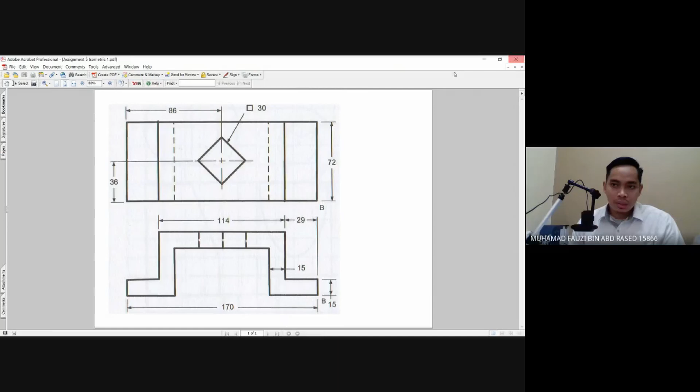I know some of you might have a problem understanding and completing the drawing from orthographic to isometric, so this geometry will be your assignment. Please pay attention, and I really hope you can follow my steps. I will demonstrate, and then you can follow me.

For isometric, before this we already talked about two things: the first is isometric drawing, and the second is isometric sketch. Drawing is this one, where we use all the drawing tools - your ruler, your T-square, your drawing board, your compass. For isometric sketch, we will just use pencil and nothing else - no ruler, no T-square, no set square, no compass, just you and your paper and your pencil or pen.

That isometric sketch I will cover after I do the demonstration for this geometry. Alright, let's start.

If you have this orthographic drawing, you have the front view and this is the top view. So for isometry, the first thing first is you need to have a proper plan - you need to plan how to convert this orthographic drawing to isometric drawing.

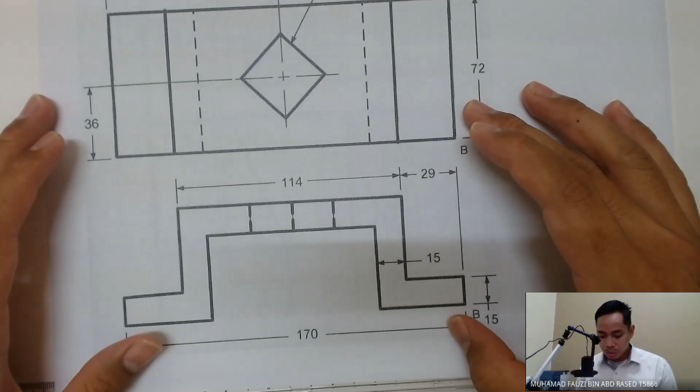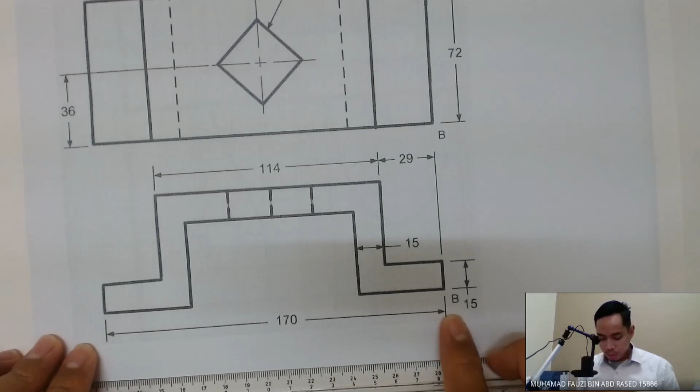With a given drawing sheet - for this we have A3 size paper - you need to plan according to the dimension of your part. As you can see, the length of your part is 170mm, the width is 72, and then the height - I think we don't have the proper height here, so let me draw it for you.

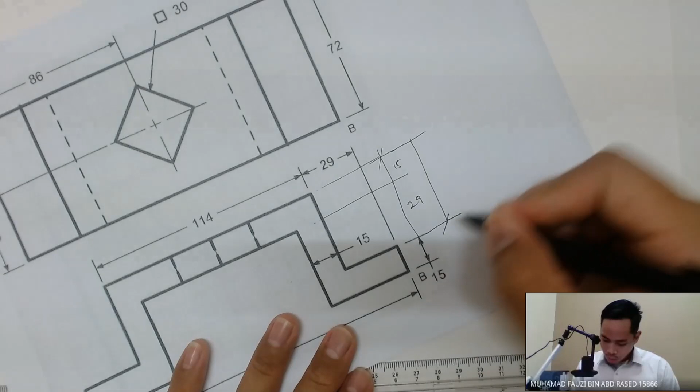Let's do some assumptions here. We got 15 here, this one is also 15, so this one is 15. Just make it 15, and it's up to here. Then we got 29, just repeat this, okay? And then for this dimension is 44, 44, then 15 - the total we got is 59, right?

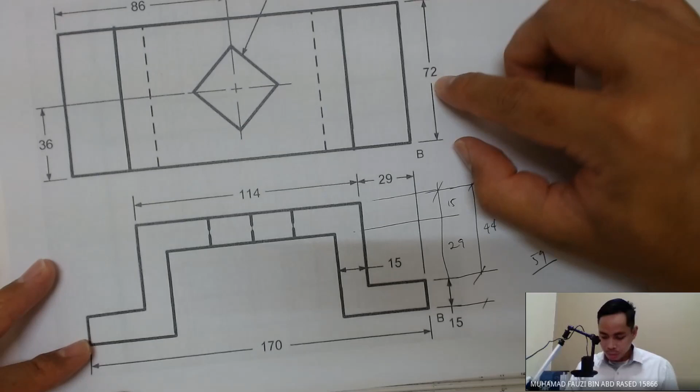So because your dimension is 170, 59 for the height, and the width is 72, your drawing needs to be a little bit offset to the right hand side. You cannot do it at the center - you need to go a little bit to the right side for your isometric axis.

For isometric axis, use your HB pencil for your construction line. Make your vertical line, and then a 30-degree line to the right hand side, and at the same point make another line to your left hand side. So this is your isometric axis.

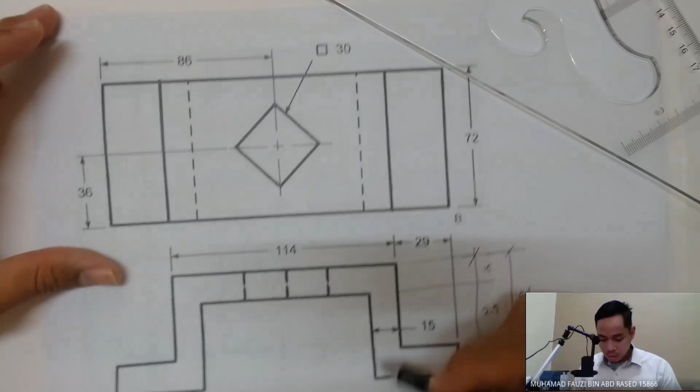Now the first thing you need to do for isometric drawing is what we call the enclosing box. The enclosing box is the box that will cover the whole features or whole shape of your part. That means first you need to ignore all the features - this L shape, this C shape, and this box here. You need to ignore it first. What you need to do is the enclosing box.

Here the line we have 170mm, so you need to measure 170mm. Actually, I've intentionally put 171mm here because at this point I will use at 1mm here.

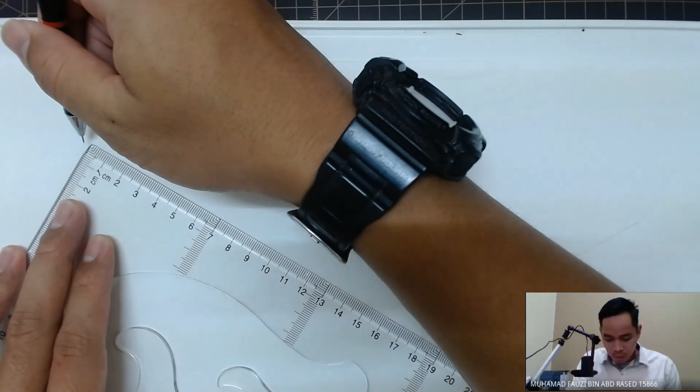I can use it at here, but usually you will lose accuracy because sometimes the angle of your pencil is not correct, and then you might make a mistake marking the correct dimension. So usually I will put it 1mm more than it's supposed to be - so it's here 1. I need to extend the line. So this is the mark, right?

If you have a question or maybe you don't understand, just ask, it's okay. Actually you have this mark 170, and what you need to do is bring it down.

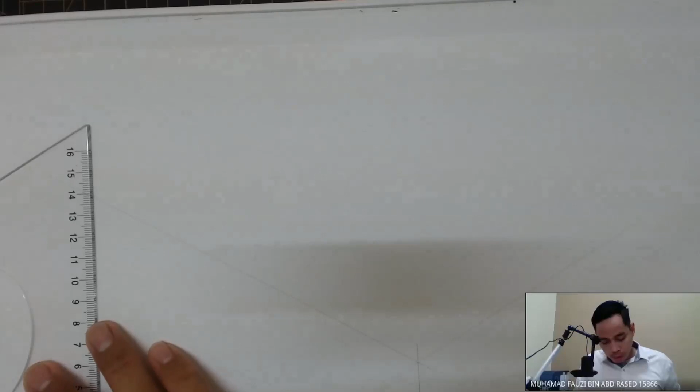Because isometric drawing is all about three axes - you got axis 1, 2, 3, it's all about this. So for this mark, we already put it on this line. What you need to do is add another two lines - the vertical line, and then at the same point make a 30-degree line to your left hand side and right hand side. That's it.

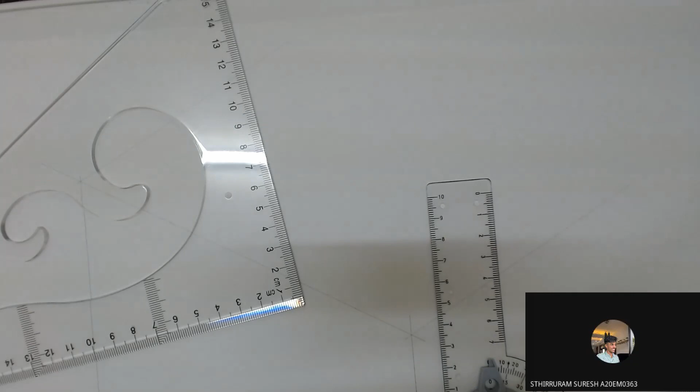Next, the height is 59. Excuse me doctor - yes - you construct another three axis point on the other end? Is it at the end of 170? Yes, at the end of 170. We just now measured 170 here, right? From this point to this point is 170. Okay, thank you doctor.

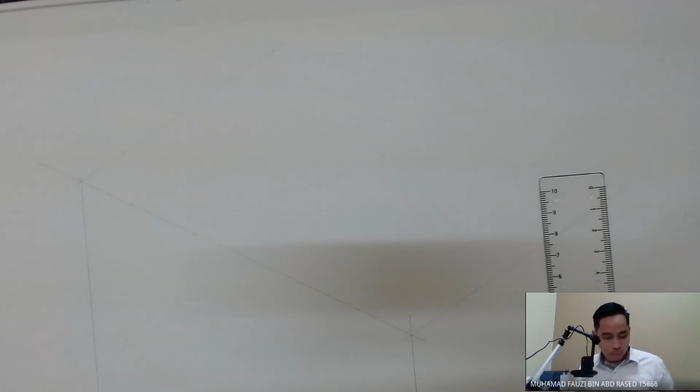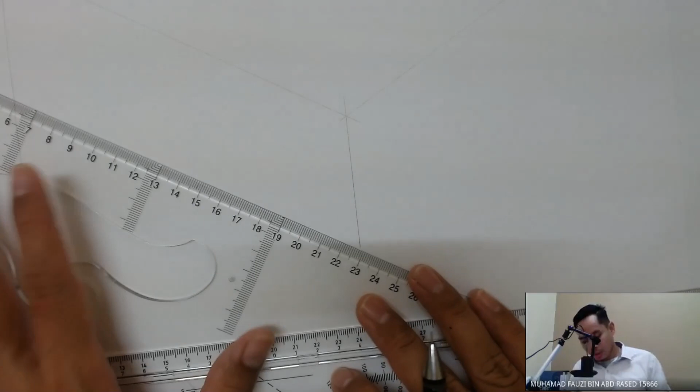Because currently we try to make the so-called enclosing box for our geometry, first you need this box. So 59 here - this is your mark, 59mm. And then from this point, we already marked it on this vertical line, so what you need to add is a 30-degree line to the right hand side, and another 30-degree line to your left hand side. Isometric is always about these three lines.

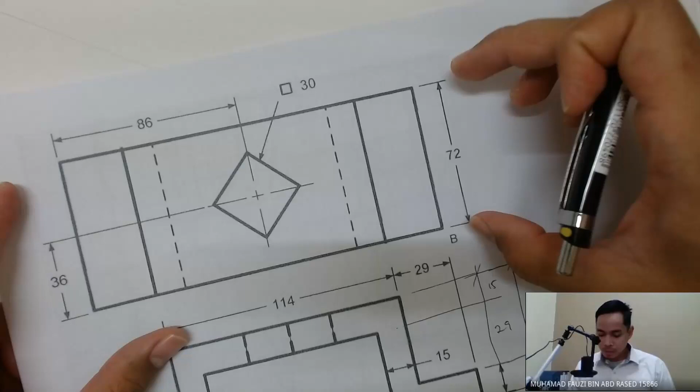Now we got the width. Okay, the width is 72. So please pay attention on your dimension, because maybe you see this 72 and thought this one is the height of the part. Actually it's not, this is the top view or plan view, so that means this dimension represents the width, not the height. The height you need to measure from your front view.

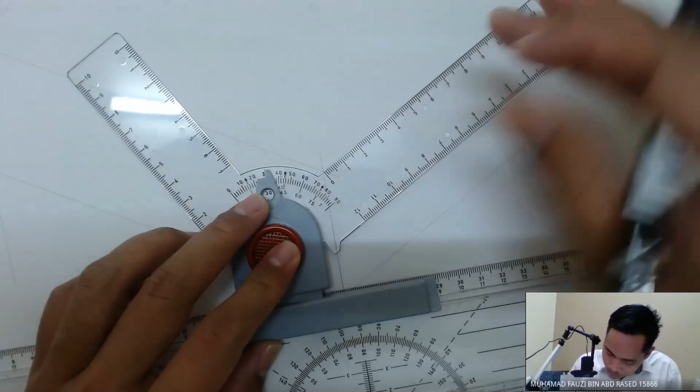Right, so we got 72 there for your width. Mark 72. So you got this mark, and then because this mark lies on this 30-degree line to your right hand side, what you need to do is add the vertical line and then 30-degree to your left hand side.

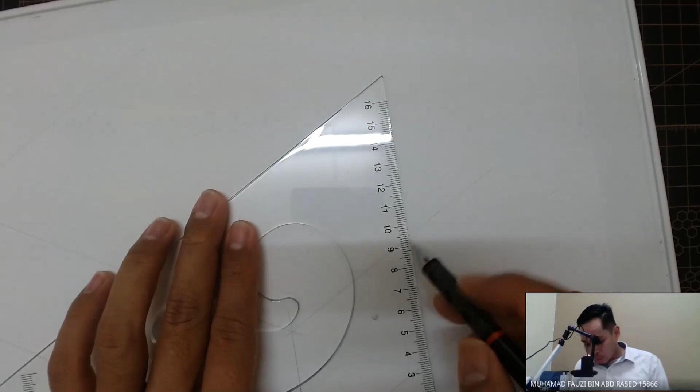Alright, now we finish our so-called enclosing box. So this is the box to accommodate this geometry. Now next, here we have this front view and then top view. Usually I will do the front view first. So for our box, this is the front view, this is the top view, and this one is for the right hand side view.

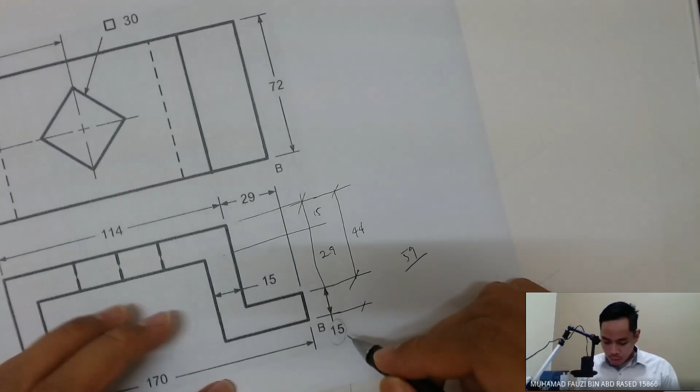So we have this 15 mm here, mark 15 mm from this bottom, for the bottom of your enclosing box here point, and then 15 mm there.

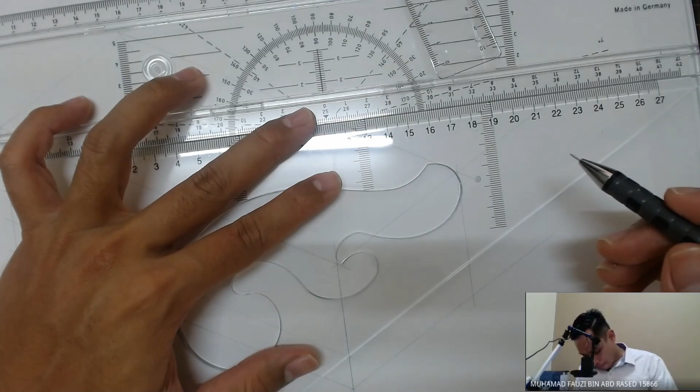And you got this mark, and so again it's all about three axes. You already have this on the vertical line, so make another two lines to your left hand side and then your right hand side. So here we have these two lines that intersect to these lines and this line.

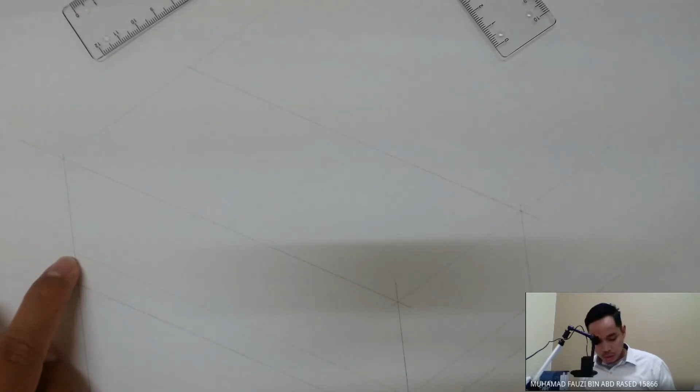But you need to refer to your geometry again - is it really necessary for you to add the lines here or not? For example, we have this line, we have this geometry, obviously we have this L shape here, so we have this space here. Definitely we need to make another line that connects to here, right? We need to have this line.

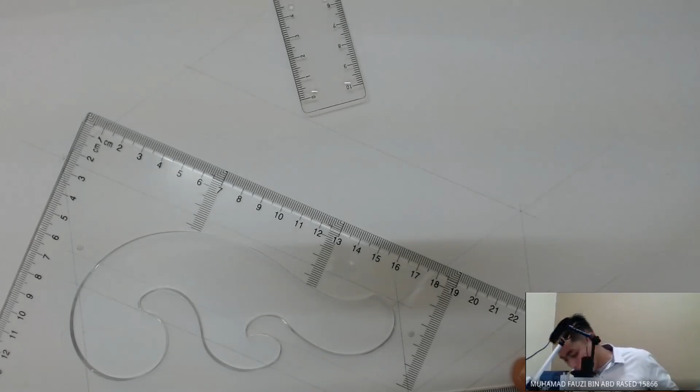So make your... right, so you have this line, and then it's the base for your object. And then we have this - the length of this part is 29 plus 15, that is 44, right?

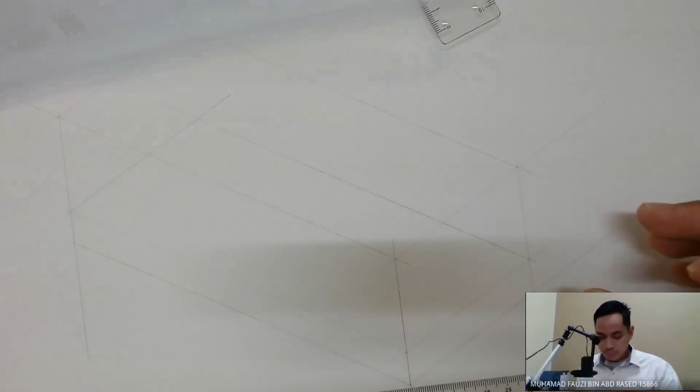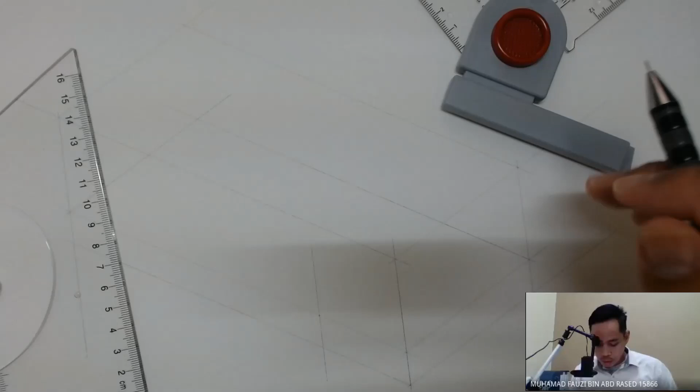So, put 44 mm mark here, and then mark, make a vertical line. Vertical line, just like this. So what you need to do now is measure another 29 mm here for this at this line.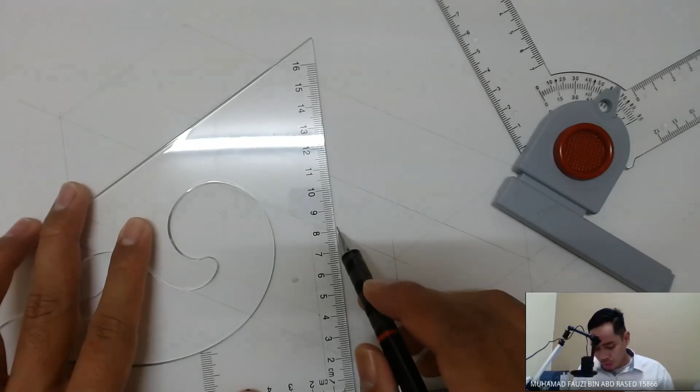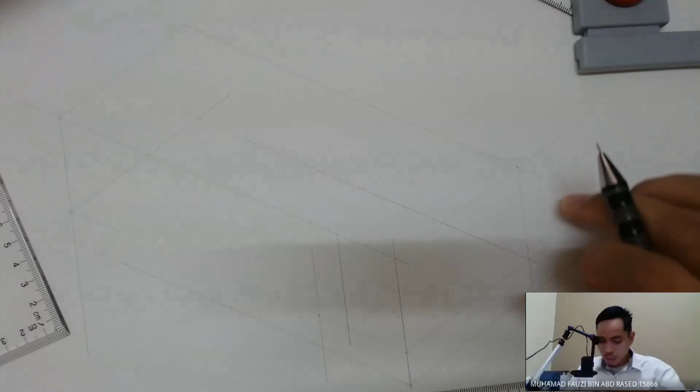29, that's there, and then make vertical line. This is the vertical line here, and then from your top view we have this object line, so that means at this point you need to make the line to your right hand side.

To your line, and then same goes to this intersection point here. And then this line actually at this edge, and this is the same line. 1 and 2 really lie on the same line, and because this is from the top view, that's why we have this one and two line.

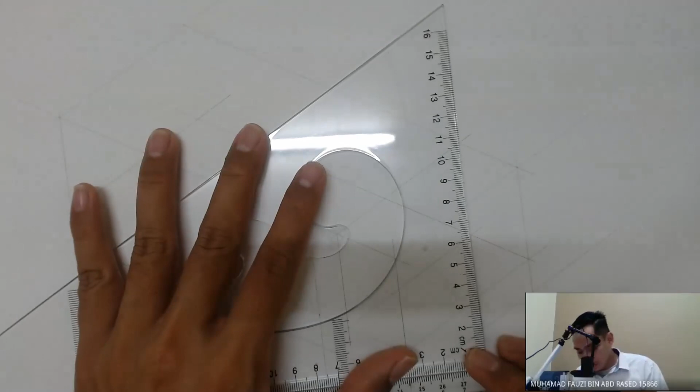Alright, next we have this intersection. So this actually is at here at this point, right? So that means you need to make the vertical line at this point.

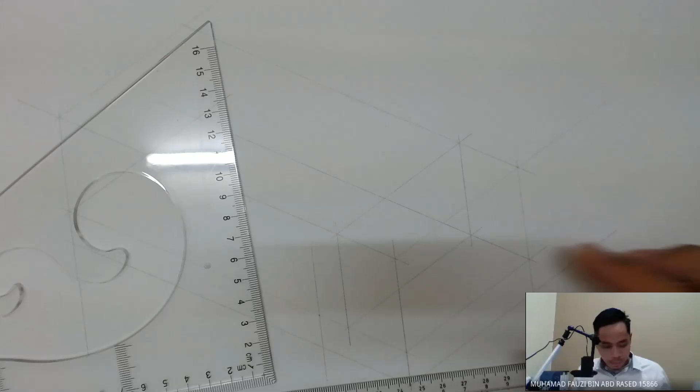Next we have this 15, and just assume all of this dimension is 15 - same goes to this part is 15. So at this line you need to measure 15 mm, so this is your mark, and then bring it to your left.

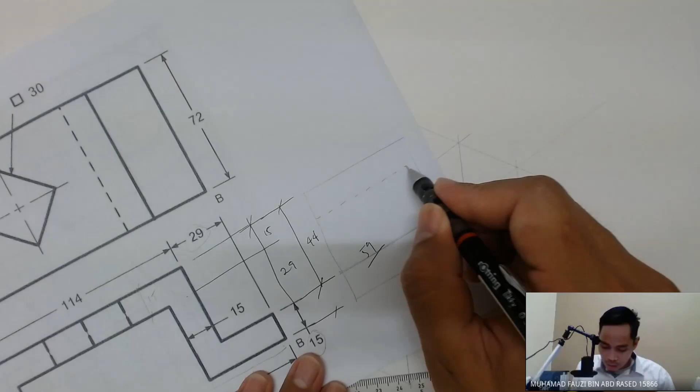So you have this one, and then the question is, do you need to make a line on your right? Obviously, if you draw the shape of your right side view, this is the box, and then you have this object line that represents this one. Then this one is a hidden line that represents these features. So at this point, at this line, no need to make the lines here because it's a hidden line. Obviously, in our isometric drawing, there's no hidden line, so no need to make another line here, just leave it like this.

Alright, next we have this 114, and from this point 114 to your left. 114 mm this line, so as usual, because at this 114 we have this at the top view, we have this object line.

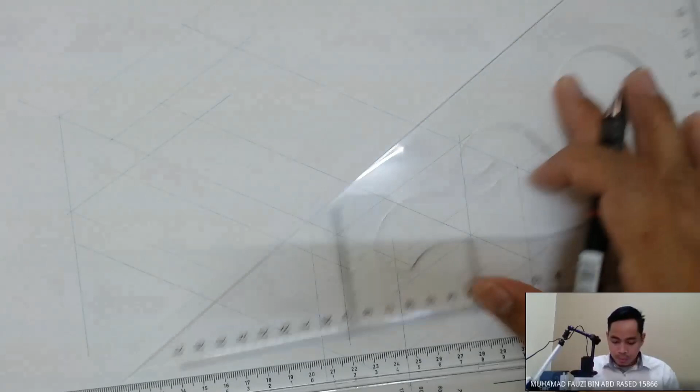Let's make the lines at the top view, and then same goes to, because at the front view we have this line, so we make the vertical line at this point, just like that.

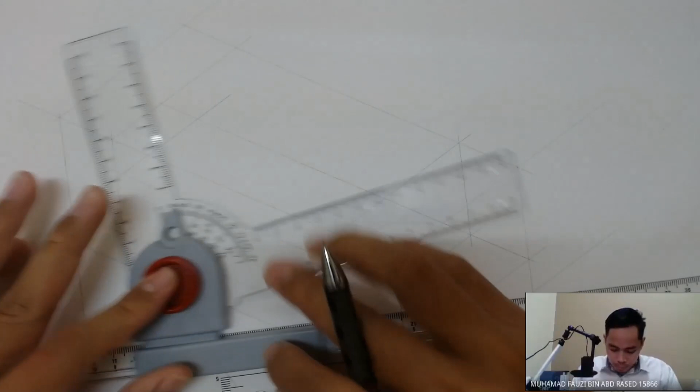And then again, because our assumption is 15, at this point we measure 15 point to your right, so downward. Alright, so 15.

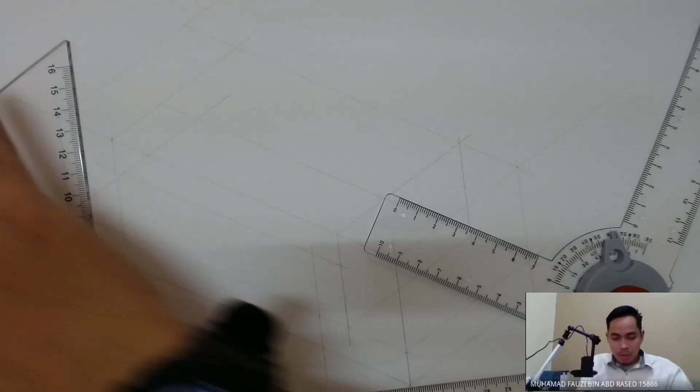So we got this mark, and then same thing, make the vertical line here. Right here, this way. This one, okay.

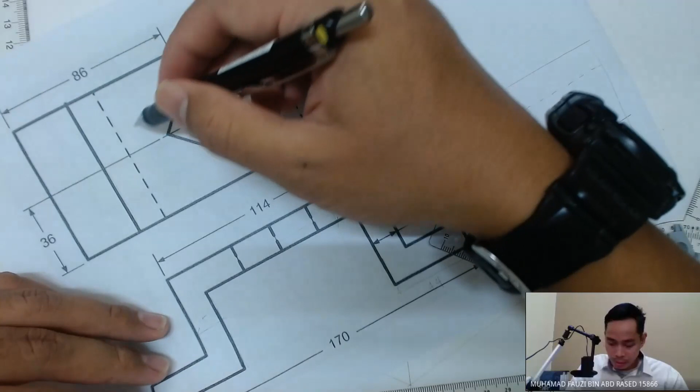For this view, as you can see here, this is the hidden line that represents these features from the top. We see these features have this hidden line. So at the base here, it's supposed to be another object line, right? Because this is the base, and then we have this slot, this empty space here.

So by right, this one is gonna be the base for our part. Make a line here, such a line here, only up to this point. No need to make it longer because it's not really necessary.

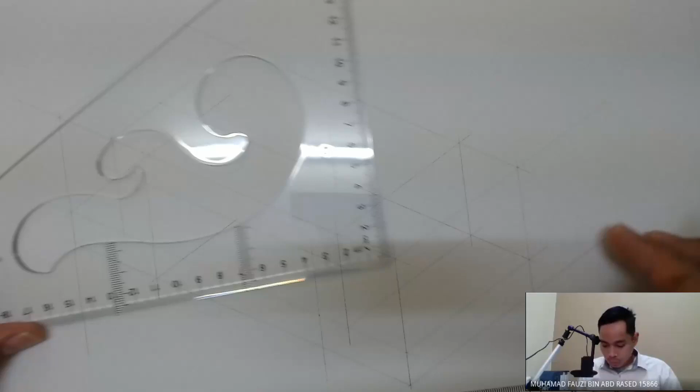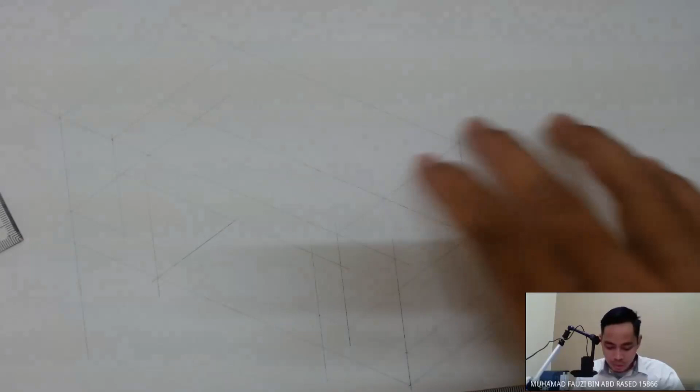So now we already have this geometry. Can you see the exact shape of our geometry from this construction line? Do you see or not? Yes, you can see, right? So this is actually how isometric drawing works.

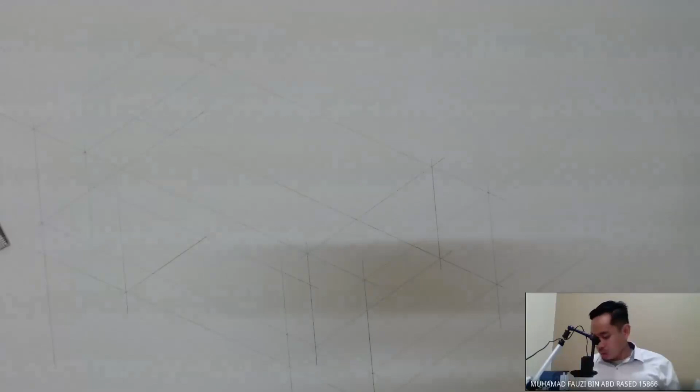Because after you draw all the construction lines, you may see the overall, exact shape of our part. So just use your 2B pencil, and enlighten the lines that represent the object line.

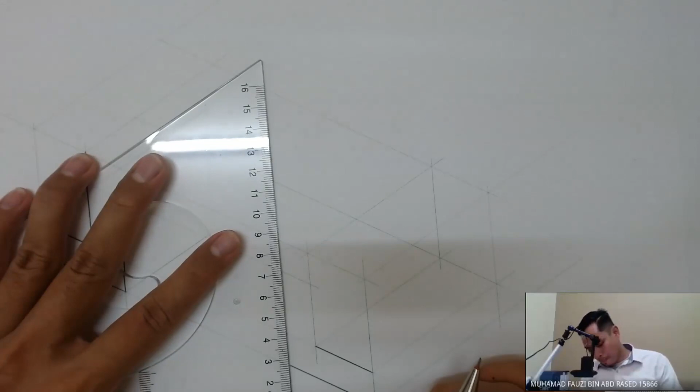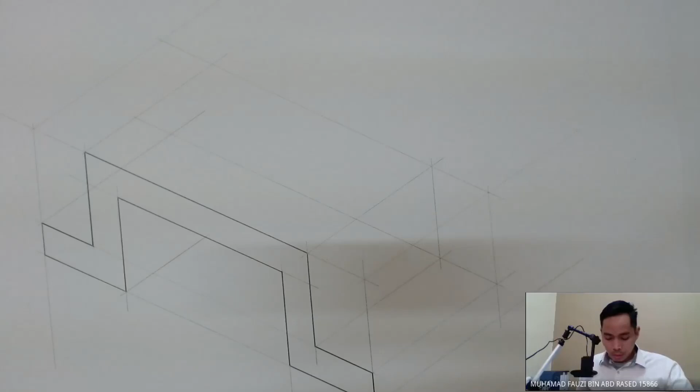Now we finish our front view. This is our front view. You can see here, this one is this one, right? Next, we will do the object line for other views, for example, this right side view.

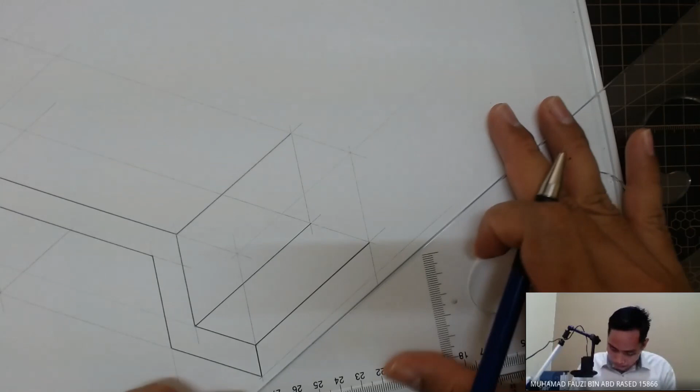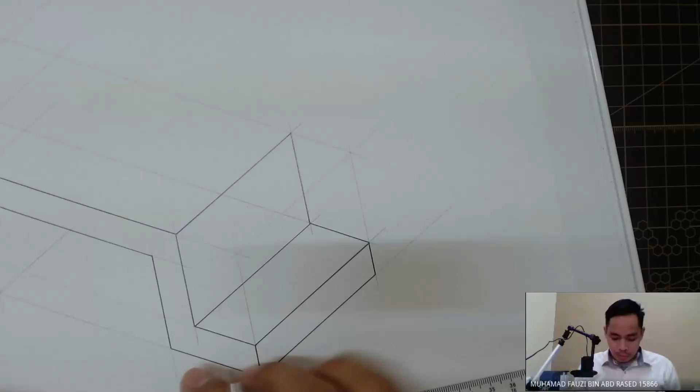When you complete your right side view, you have this surface represent this surface, and then you got this surface represent this surface. And then again you have this line, this thing goes to this one because this is empty space here. So make the line from this point to this point.

Okay, so that's it. Next, let's proceed to our top view, our top view.

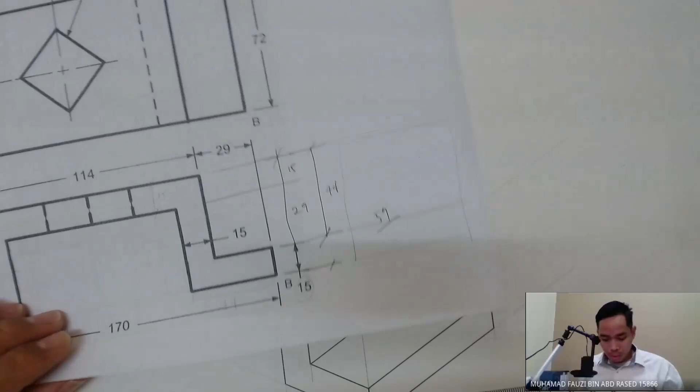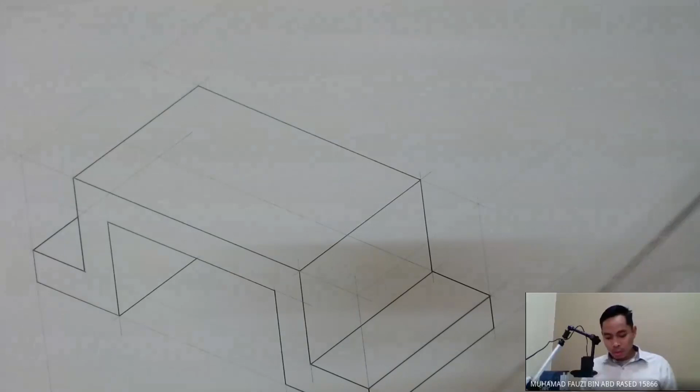Next, this point, only from this point to this line. No cross, because in isometric drawing, again, no hidden line. Just make it up to this point. So yeah, this is our shape of our parts. Next is we have this hole.

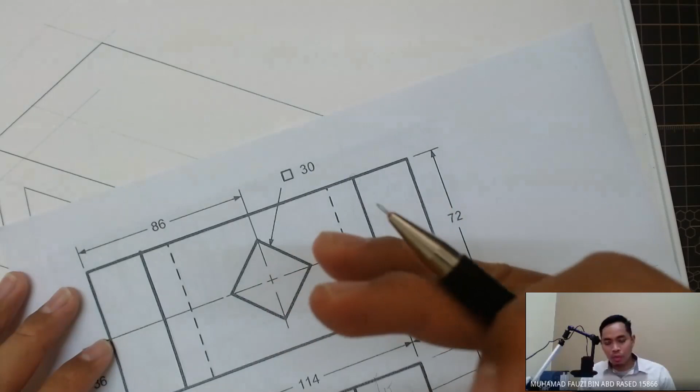The dimension is square 30. So in drawing, actually, you will see some of this kind of notation. Before this, we're talking about holes, drill, or the notation like that, and then sometimes the other part is we call C bore. Actually, the C bore represents counter bore. Later I will explain to you what it means.

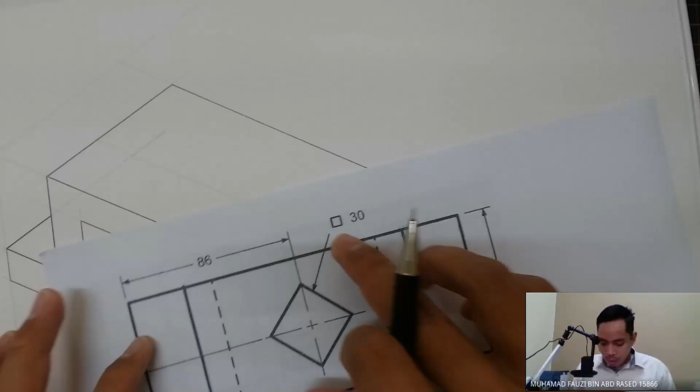So we have this square 30. That means this square has 30 mm fixed on each side. You need to draw it at this top surface, this is your top view, so this is your top surface.

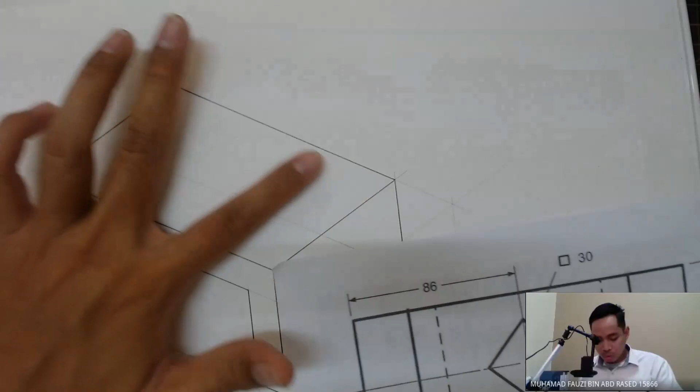So with the given dimension, its center is 36 and 86. 36 on this axis, and then 86 on this axis. Actually you can translate it to your right hand side, it's also 36.

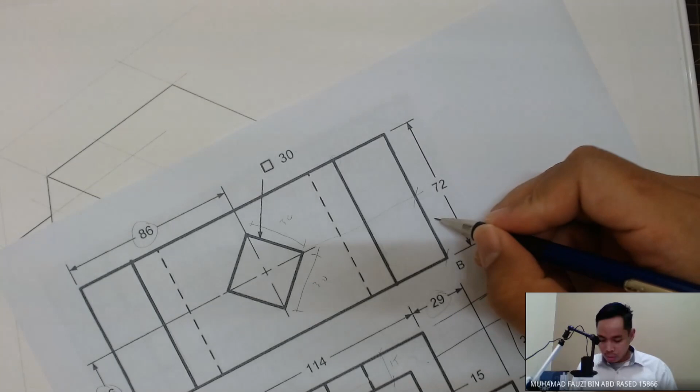So you have this, we call it axis. Just straight away put the 36 mm from this center. Here is right there, and then make the line to your left. So this is your line.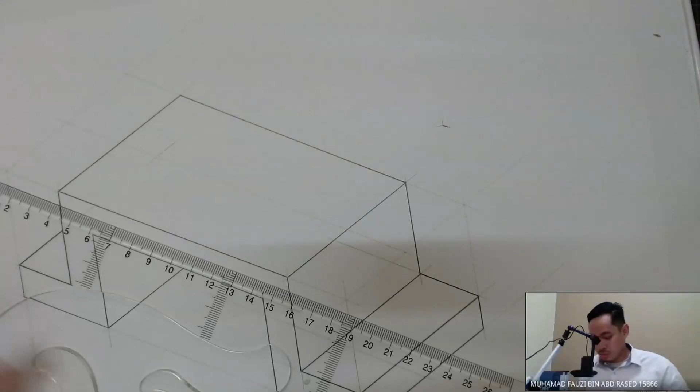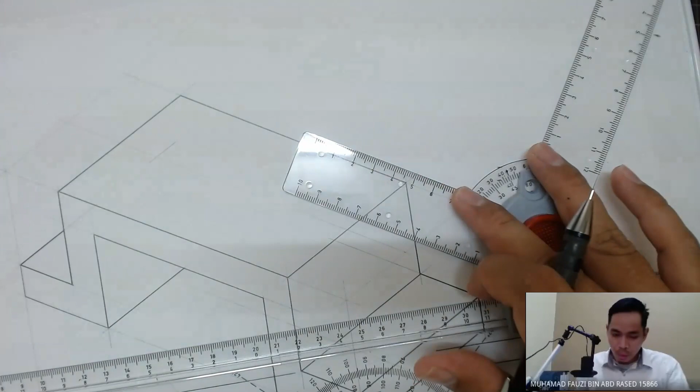The next thing is we got the 86 mm here, and then measure 86. Don't get it wrong, because this is the edge of your visible surface. However, from this edge, that means you need to measure from this point, make it 86 from here.

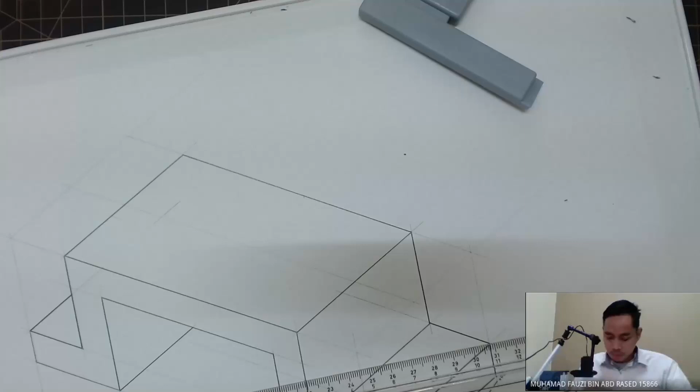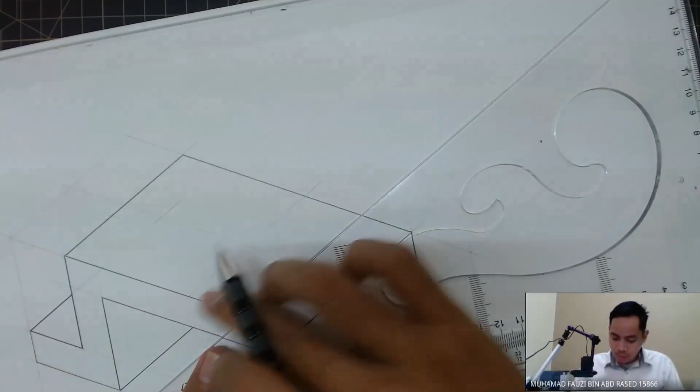And 86 mm, it's right here, and then you got this point, and then use your triangle, make lines right here. So this is our center of our square, this square hole.

Right, next we have 30 mm here. This one is 30 mm, and then another one is 30 mm. So we have this one, 30 and then 30.

So we can solve it by mathematics. I think the answer is 42.4, right? So we just make it 42 mm. For this line, 42, just make it 42.

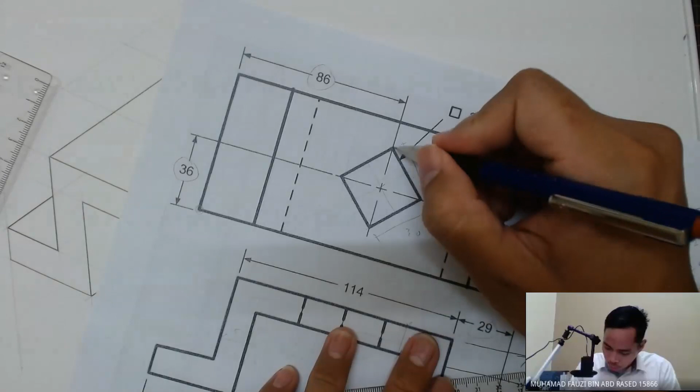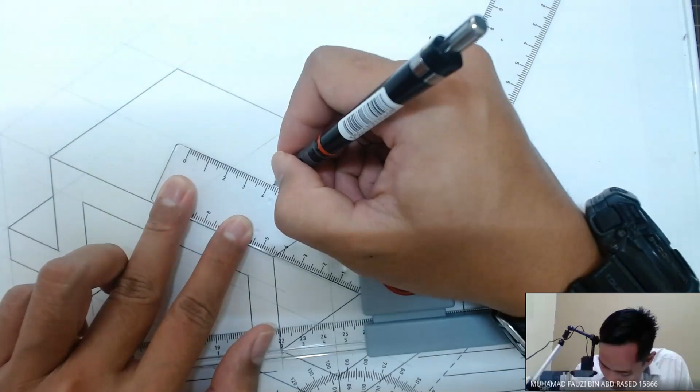Right, so let's do it. It's 42, so you need to put the center at 21 here, 21 at the center, and then you will have this first mark and then this mark. Remember it's 42 mm. Same goes to this line.

We have this figure here, and then 42 is here. So we have this 1, 2, 3, and 4. All right, so let's connect the marks.

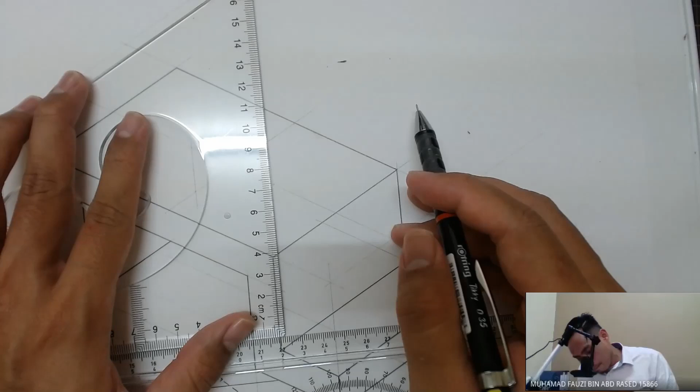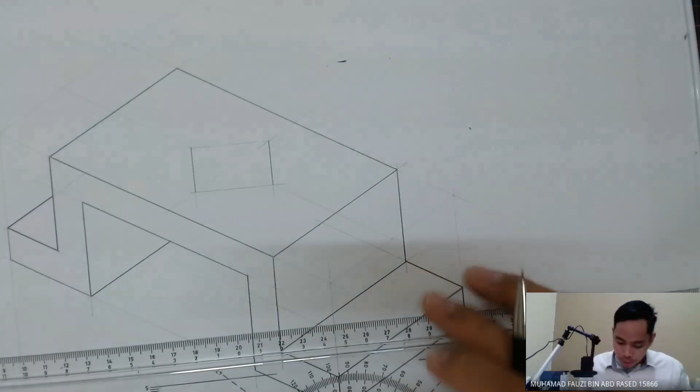Right, so I guess we have this geometry. Lighten your lines to pencil. Nice, so now we have this hole.

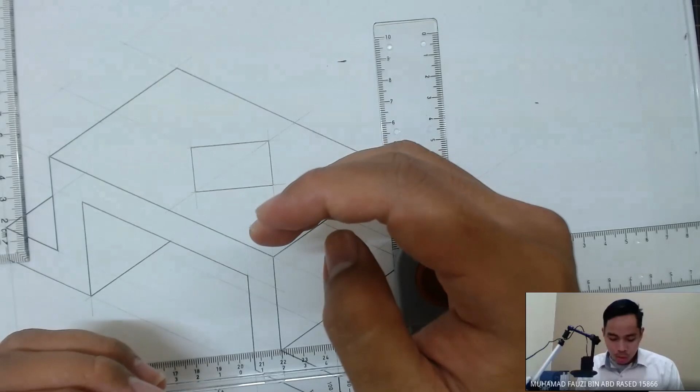The next thing is you need to remember we have this hole, so every single hole actually has empty space inside. So logically, we need to find another line here that might be seen. We have 15 mm here because this one is 15, the thickness. So mark 15 mm here.

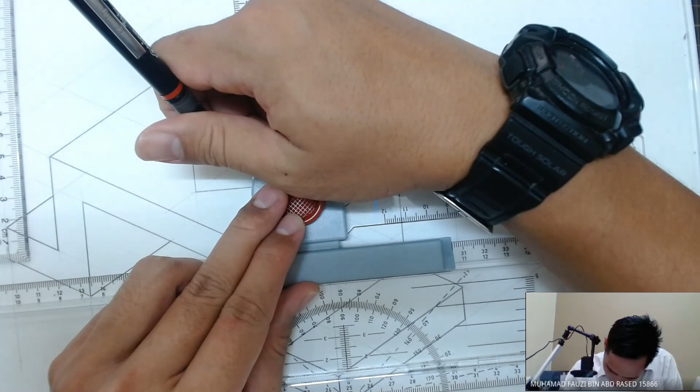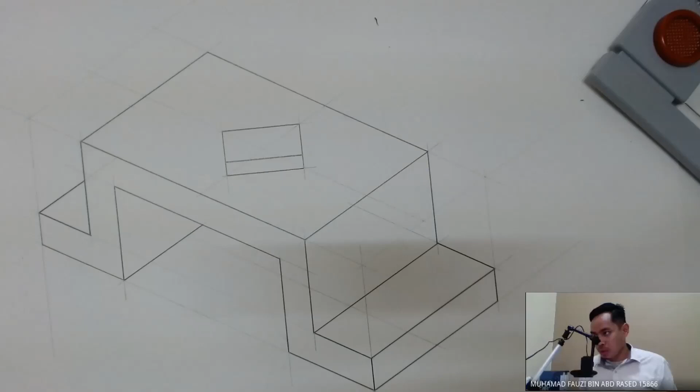Make another object line here, okay. So is it make sense? Right, so yeah, I think we already finished our first isometric assignment, right?